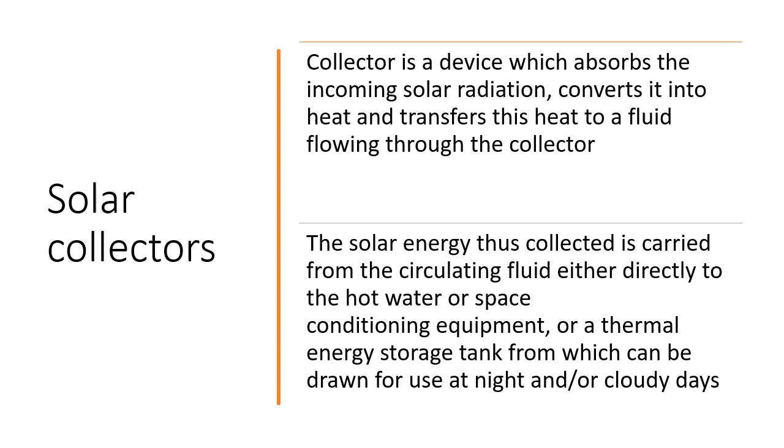The solar energy thus collected is carried by the circulating fluid either directly to the hot water or space conditioning equipment or to a thermal energy storage tank, from which it can be drawn for use at night and/or cloudy days. So let us discuss the types of solar thermal collectors.

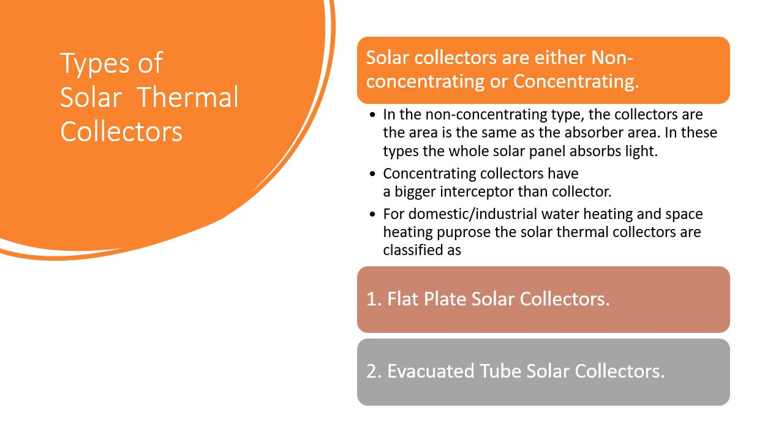Solar thermal collectors are either non-concentrating or concentrating. In the non-concentrating type, the collector area is the same as the absorber area. In these types, the whole solar panel absorbs light. Concentrating collectors have a bigger interceptor than absorber. For domestic and industrial water heating and space heating purposes, solar thermal collectors are classified as flat plate solar collectors and evacuated tube solar collectors.

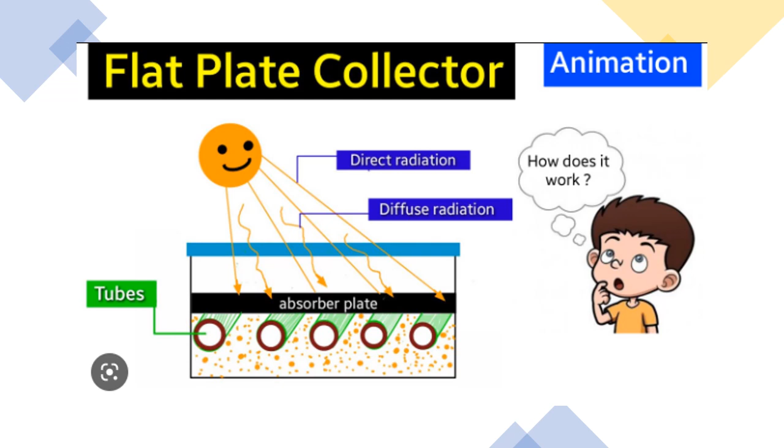So, what is a flat plate collector? This is an animation. We can see the solar light is directly absorbed by the flat plate, and there is a tube-like structure. So, let's discuss what a flat plate solar collector is.

Flat plate collectors, developed by Hottel and Whillier in the 1950s, are the most common type of solar collector, widely used for domestic household water heating and space heating where the demand temperature is low. A flat plate collector is basically a black surface placed in the convenient path of the sun.

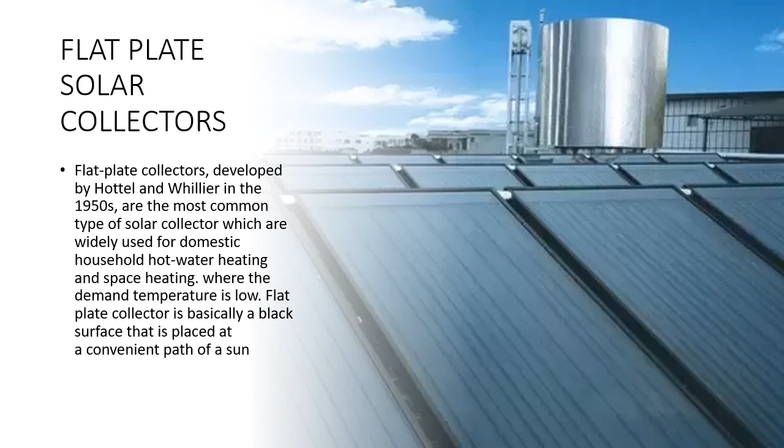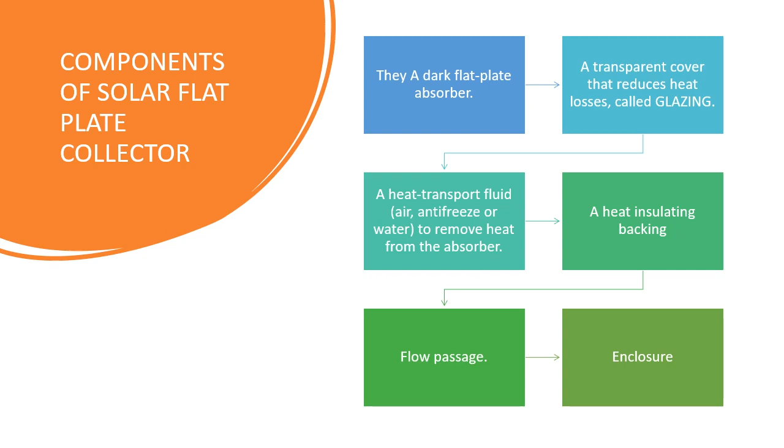Components of a solar flat plate collector: the dark flat absorber, a transparent cover that reduces heat losses called glazing, a heat transport fluid such as air, antifreeze or water to remove heat from the absorber, a heat insulating backing, flow passages, and an enclosure. So this is the diagram. Here we have the header, riser, glazing, absorber plate, insulation, back plate.

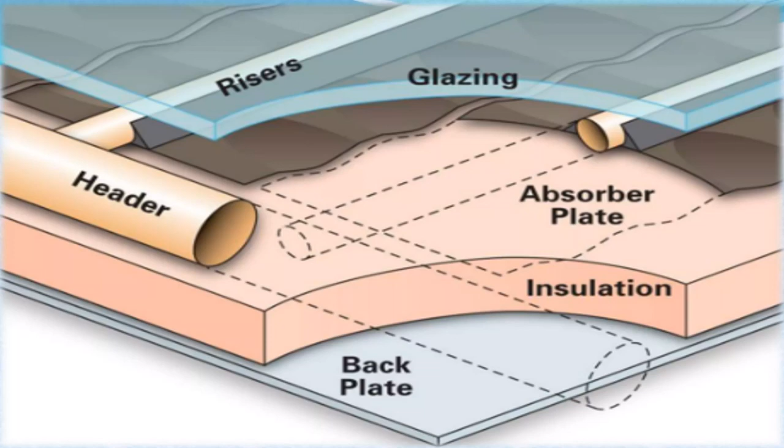What is the absorber plate? It is usually made of copper, steel or plastic. The surface is covered with a flat black material of high absorptance. If copper or steel is used, it is possible to apply a selective coating that maximizes the absorption of solar energy and minimizes the radiation emitted by the plate.

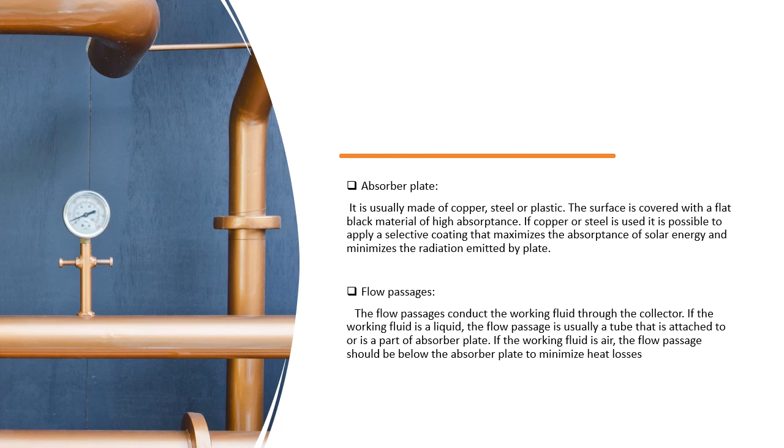What are flow passages? The flow passages conduct the working fluid through the collector. If the working fluid is a liquid, the flow passage is usually a tube that is attached to or is a part of the absorber plate. If the working fluid is air, the flow passage should be below the absorber plate to minimize heat losses.

What is the cover plate? To reduce convective or radiative heat losses from the absorber, one or two transparent covers are generally placed above the absorber plate. They are usually made from glass or plastic. Insulation: these are materials such as fiberglass placed at the back and sides of the collector to reduce heat losses. So next is the enclosure.

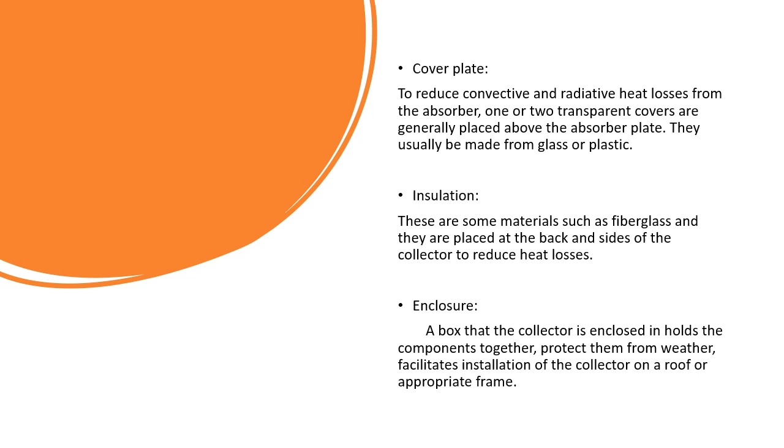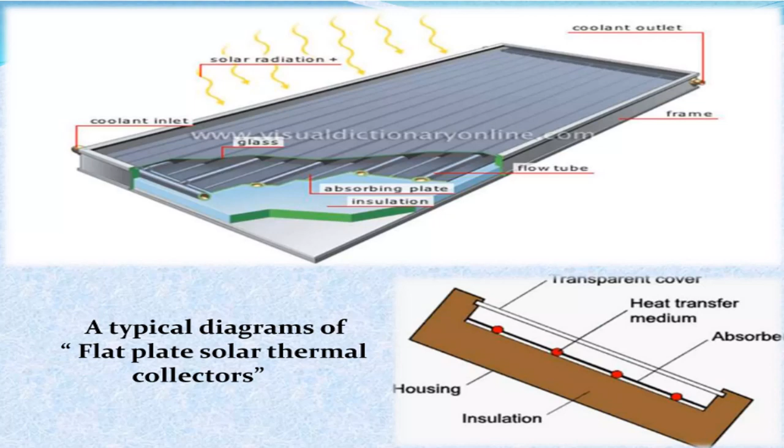The box that the collector is enclosed in holds the components together, protects them from weather, and facilitates installation of the collector on a roof or appropriate frame. A typical diagram of a flat plate solar thermal collector: here we can see solar radiation, coolant inlet, glass, absorbing plate, insulation, flow tube, frame, coolant outlet. We can see the transparent cover, heat transfer medium, absorber, insulation, housing.

So let's discuss the working principle of flat plate collectors. In flat plate collectors, sunlight passes through the glazing and strikes the absorber plate, which heats up, changing solar energy into heat energy. The heat is transferred to a fluid, which may be water, oil, or a gas such as air, passing through pipes attached to the absorber plate by means of convective heat transfer.

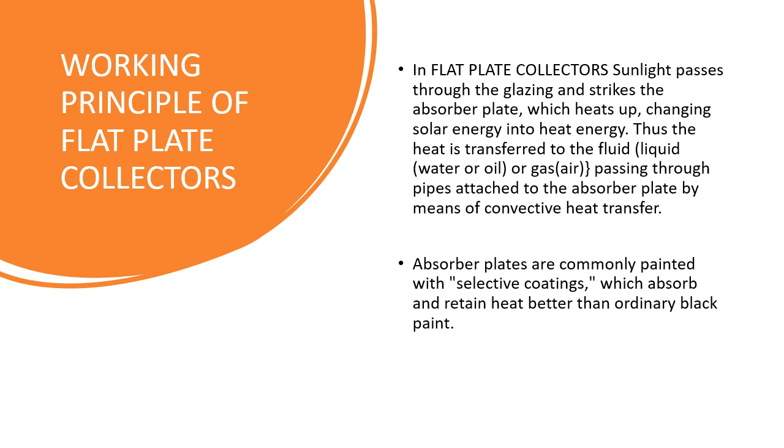Absorber plates are commonly painted with selective coatings which absorb and retain heat better than ordinary black paint. Absorber plates are usually metallic, typically copper or aluminum, because metal is a good heat conductor. Copper is more expensive, but it is a better conductor and less prone to corrosion than aluminum.

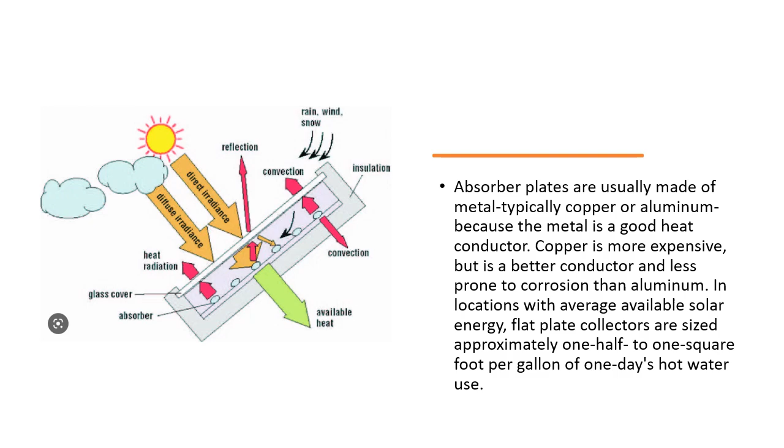In locations with average available solar energy, flat plate collectors are sized approximately one half to one square foot per gallon of one day's hot water use. Applications. So let us see the applications of flat plate collectors. Flat plate collectors are used for both domestic and commercial applications.

What are domestic applications? Flat plate collectors are mainly used in residential buildings where the demand for hot water has a large impact on energy bills. This generally means a large family or a situation in which the hot water demand is excessive due to frequent laundry washing.

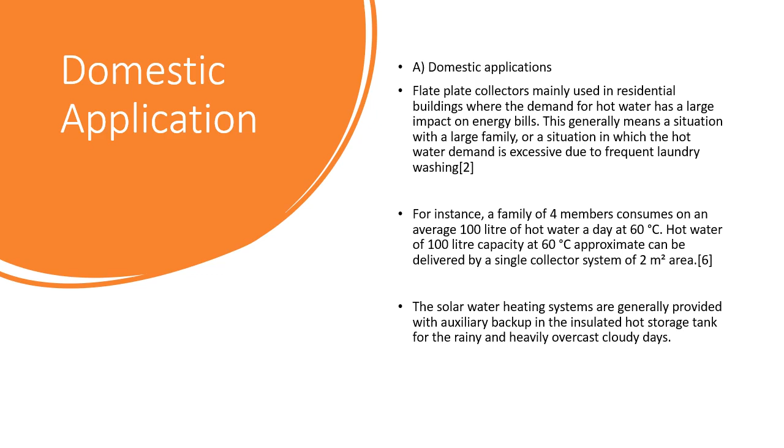For instance, a family of 4 members consumes on average 100 liters of hot water a day at 60 degrees Celsius. 100 liters of hot water at approximately 60 degrees can be delivered by a single collector system of 2 square meters area. Solar water heater systems are generally provided with an auxiliary backup in the insulated hot storage tank for rainy and heavily overcast days.

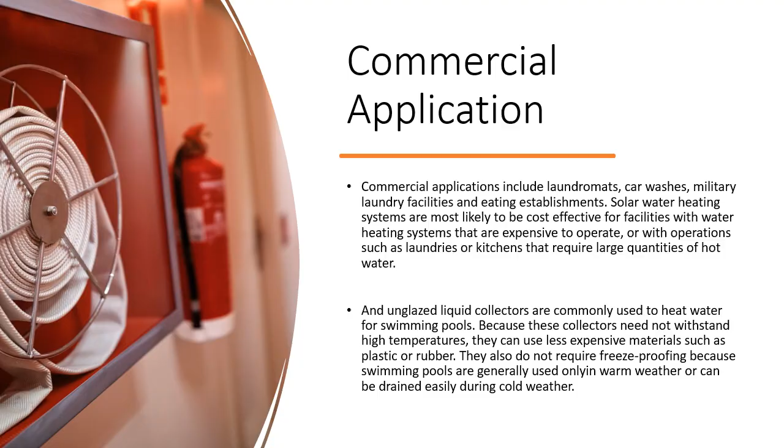Unglazed liquid collectors are commonly used to heat water for swimming pools because these collectors need not withstand high temperatures. They can use less expensive materials such as plastic or rubber. They also do not require freeze proofing because swimming pools are generally used only in warm weather or can be drained easily during cold weather. So here is a representation of how we can use them for commercial purposes.

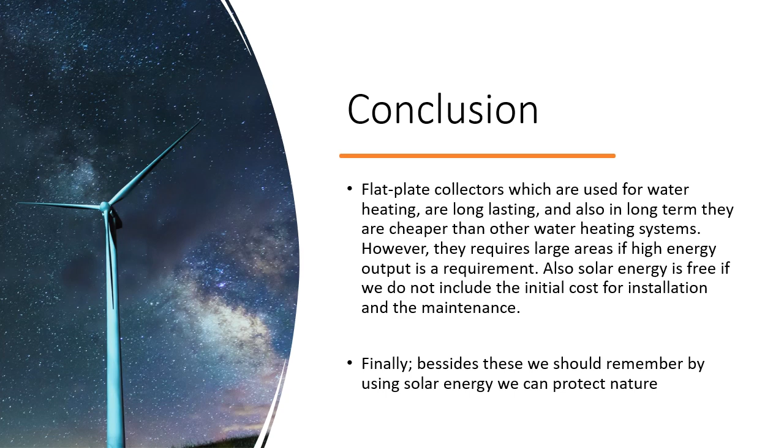So let's come to the conclusion. Flat plate collectors used for water heating are long lasting, and in the long term they are cheaper than other water heating systems. However, they require large areas if high energy output is a requirement. Also, solar energy is free if you do not include the initial cost of installation and maintenance. Finally, remember that by using solar energy we can protect nature.